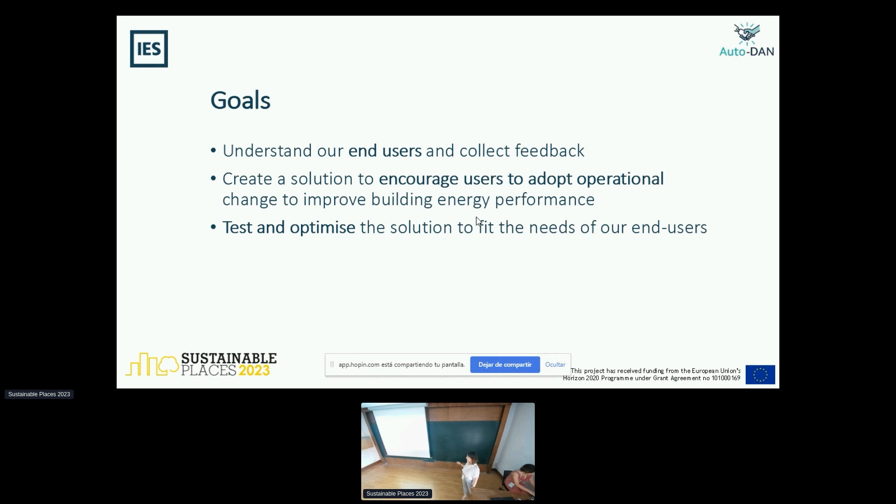Those were the goals. So the process is human-centric design. The user is the core of the whole process. And I would say it is divided in 3 blocks. First you have the strategic alignment. Then you have research and analysis, which go together. And at the end, you have design and test.

I just put a description here of a common way to describe human-centric design. This is a problem-solving technique that puts people in the center. So you actually meet the user needs, because I'm sure all of us have seen products that at the end don't meet what the user expected, and that's actually a shame, because you probably put a lot of effort into that product.

So what are the questions behind this process? The common way: why, what, and how. Why: what motivates the user? What are the drivers? Then what are the features that they expect, and how it's going to look. That's where the design comes into place, and the style of the final platform.

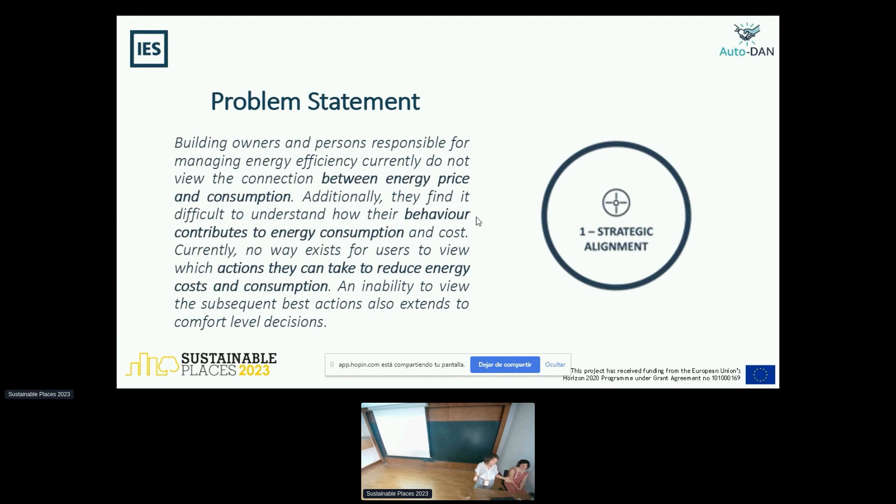the energy consumption. So currently, as I said here, there is no way for users to know which actions to take to change the energy consumption. So that was the problem. We need a dashboard, well, not a dashboard, but a full platform that helps users decide what to do to change the consumption.

So from that stage, we also defined the goal. The goal was to create these augmented intelligence dashboards where you can visualize trends in energy. You can also provide feedback and recommendations to the user and execute some demand response actions. We're trying to make the automated control of it. That's in progress at the moment.

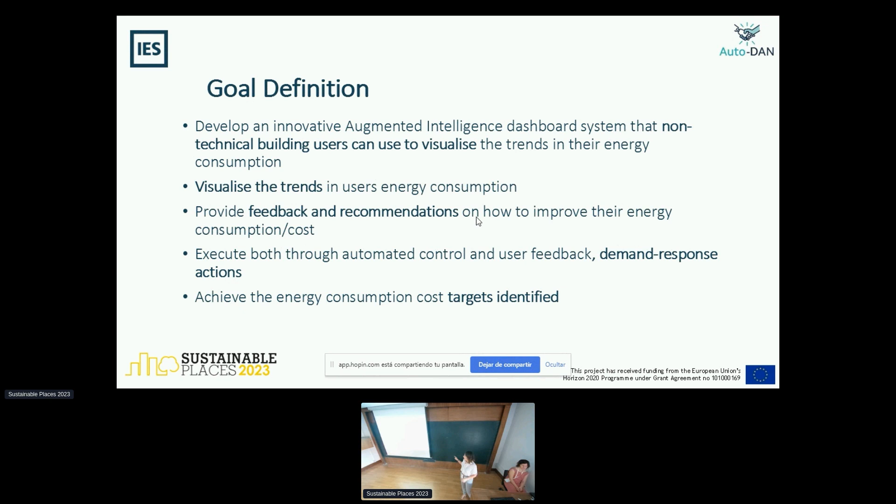And identify the targets. And then after that, when we have this problem resolved, defined, and everyone agrees, we start with the research and analysis. Here there are a lot of workshops and user interviews and desk studies on behavioral and psychological theories about how people accept certain recommendations. And this is going to give the persona that is going to fit the final development.

That takes a lot of time, because if you want to do it well, you have to use a lot of communication, and communication takes time. So after that, that's what we had in our Amsterdam project. That's the building, the users that we had. And each of them are different, and each of them have different needs and different drivers and interests. So there's a big difference between a business owner or a student, right?

So we found out most business owners or managers are more focused, as expected. They were more interested in cutting costs, reducing the energy, or knowing when this high peak is and how can I change that peak. And then you have other ones, like the students, that don't even pay attention, they don't pay the bills, so they were more keen on comfort than maybe a building manager.

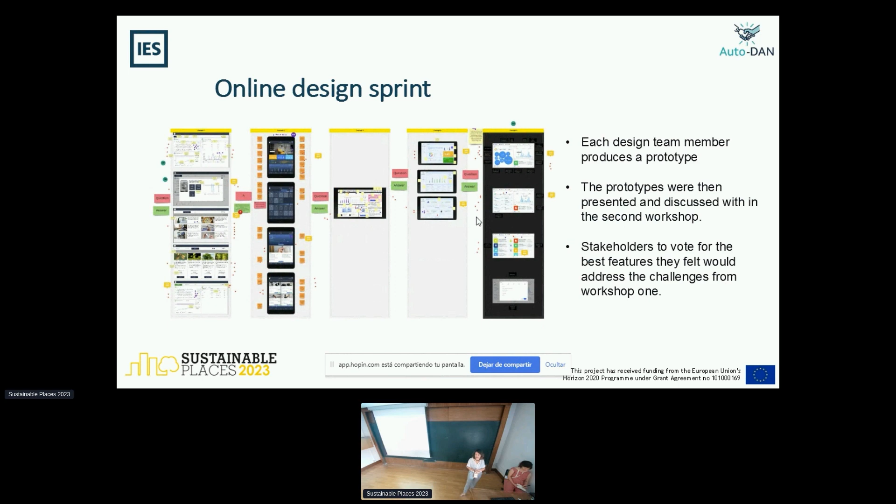I just put pictures here of the online design sprint, where each design team member produces a prototype. Then the prototype is discussed, then they decide which one is right, and at the end of the day the stakeholders vote on which one actually addresses what they expected. Not all of the solutions were validated. For some of them it was, okay, we cannot add that, right? That's also the challenge of having users involved: they want to cover everything in the needs, and that's not easy.

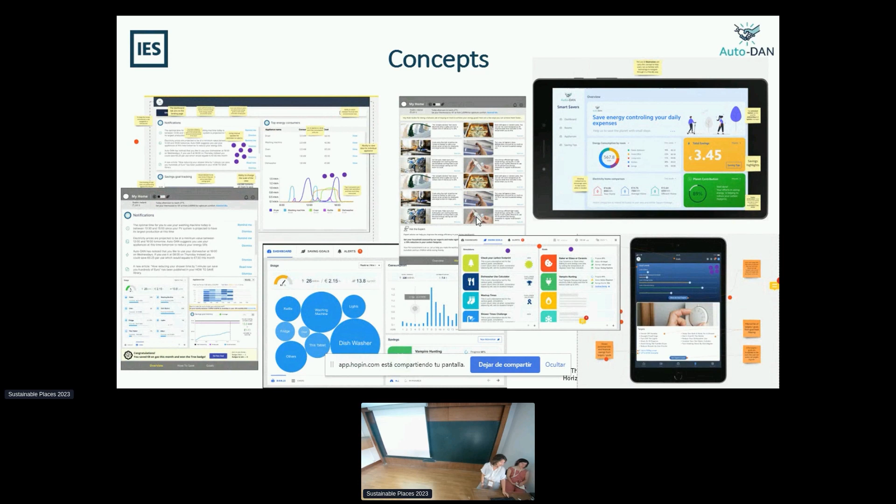The second slide is just to show you a bit of the final concepts that ended up there, and that's the final prototype. Well, as I said, I think it needs continuous input and it's going to keep improving. So that's the home page. You will open your dashboard. You will see common operational conditions like indoor conditions and temperature, right? So in the first overview, the displays you have here.

You will have the display of your real-time energy consumption and also the breakdown of the appliances, which is noisy on the back-end side because sometimes you have a smart plug, sometimes you don't, and that's a difficult one. Then you can see your energy savings compared to some goals that you can set, the appliances usage, then the sensors for humidity and temperature. And on the right-hand side you can see the recommendations: when to use your appliances based on energy prices and the pattern of your own behavior.

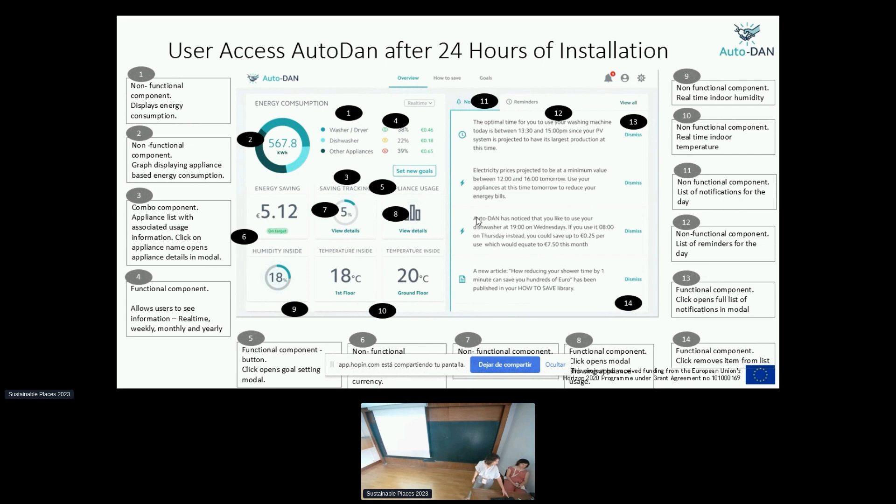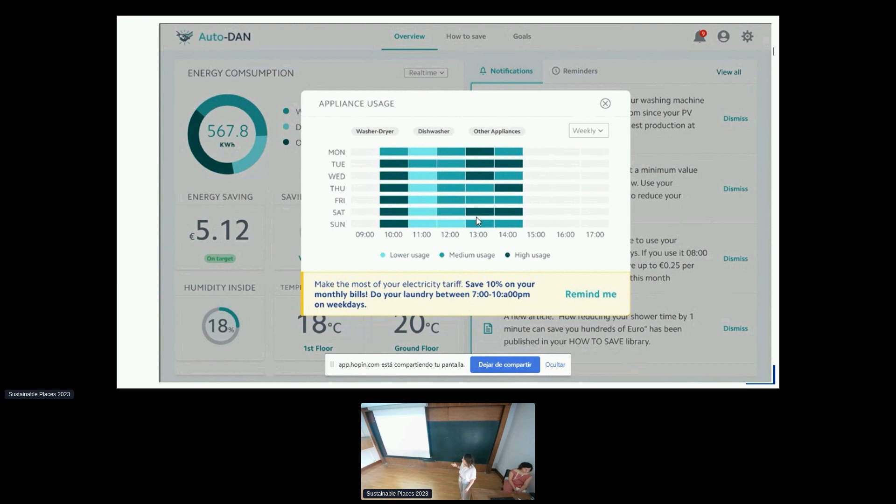I just put three tabs so we can have an idea. For the appliances usage, the user here is able to see where the peak of usage is, the lower and the medium. Because you use your appliances, but you're not aware of how often you use them. Do I put the dishwasher on all the time at the same time? So here you have a clear picture. I think it's very visual, and the user has a clear picture of when they use their appliances the most.

And that's part of the goals I was mentioning. You can set up your goals, so at the end you can compare how you are doing against your goals. Goals sometimes are just the benchmark, right? Like the previous bills maybe, or you can just check against the past. Some people are very clear, but usually at the domestic level they are more oriented to previous bills. And that's about all.

So I just put three points as conclusions. We discovered the information communicated was relevant, so we have this continuous communication with the users. We believe the energy consumption financial aspect will potentially change the drive. If you actually show that you're going to save that amount of money, that's something users like. The product, as they said, will continue to be monitored, and we still need to gather conditions in the platform to align with the whole project. Some people are doing different tools for demand response, for instance, so we need to make sure that aligns and we can show it there.

And then the last sentence: end users are not taken only as customers, but also as co-designers of the solution. I think that's the key point of the UX design team in IES, who put a lot of effort here. And that's me.

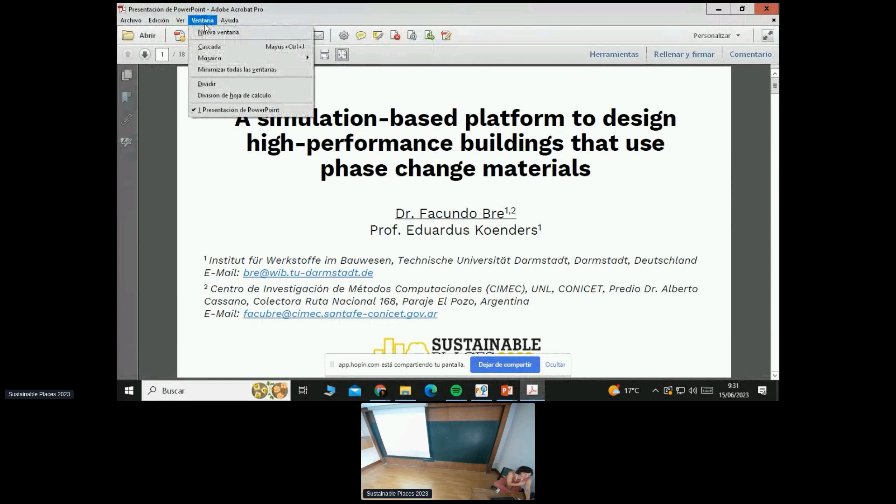Sorted. So did you receive this presentation? Yes, we fixed it so we can follow the same order. Okay. That's not the slides for today. No. But I just sent it to the account. It's not this. So this is an older version. Yeah, that's my presentation for tomorrow. Okay, sorry. I'm sorry. Maybe I sent the wrong one. This one or no? No. Okay.

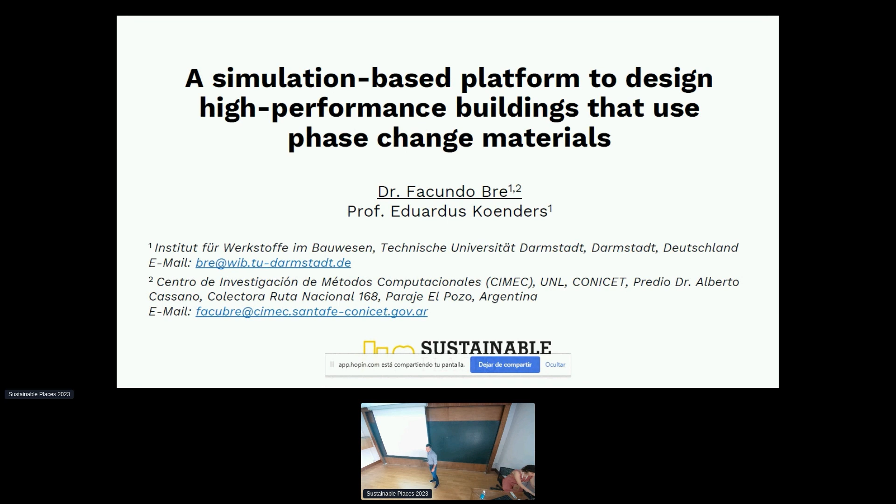Well, good morning, everyone. My name is Facundo Bre. Currently, I'm working as a Marie Curie Individual Fellow at TU Darmstadt in Germany. And today, I'm going to talk about a simulation-based platform to design high-performance buildings that use phase change materials.

So, to start, let's talk about phase change materials, or PCMs. As you probably know, these materials are substances that can absorb and release large amounts of heat during the phase transition. In this picture, we can see the main difference between a material without phase transition and a material with phase change: the PCM can accumulate and release large amounts of heat without increasing the temperature of the material and the surroundings.

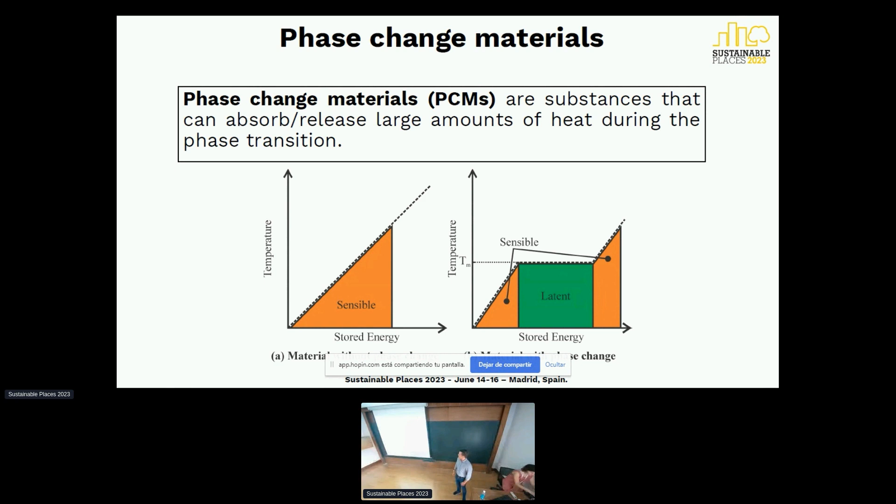We can employ this phenomenon in buildings for heating and cooling applications, but this is the ideal theory. In practice, we have the challenge to transfer this ideal theory to real-world applications. And despite plenty of contributions in this field, we see a lack of full understanding of the best way to design PCM in buildings. In this context, the 0E-BUILDINGS project aims to develop a simulation-based platform to evaluate and optimize PCM in buildings. In this presentation, I will show some of the results we got during the project.

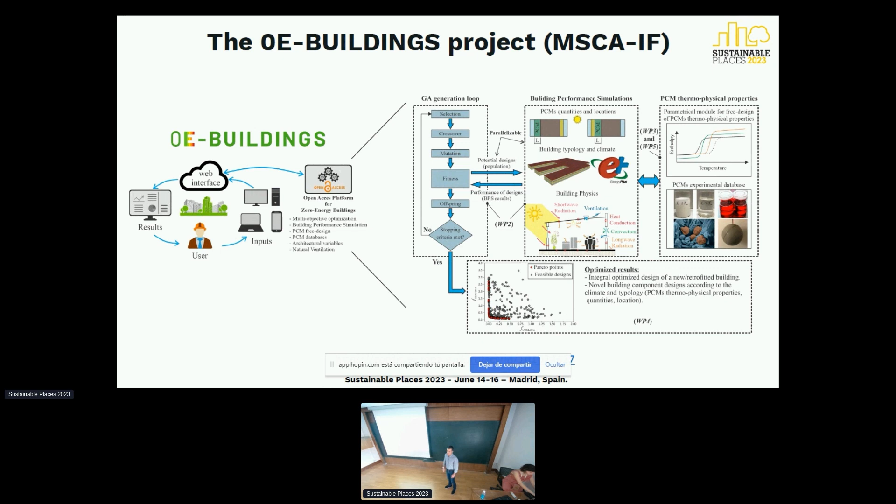My presentation is quite technical, sorry. Regarding the modeling of PCM, there are several approaches. For example, in EnergyPlus, the thermal capacity of the PCM is calculated using this equation, a numerical derivative, where above we have the difference between the current and previous enthalpy, and below the difference between the current and previous temperature. I recommend using that model, the single curve model of EnergyPlus, and the main input is the enthalpy curve of the material as a function of the temperature.

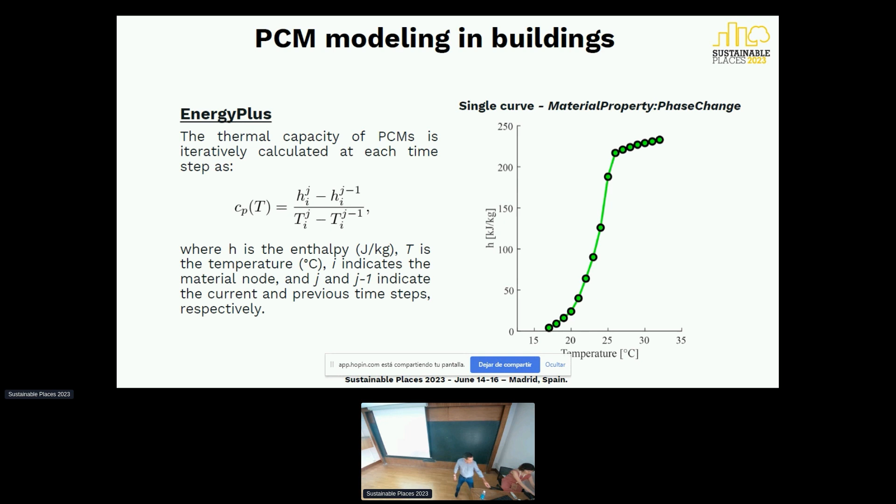There are also models to predict a particular phenomenon of PCM called hysteresis. And hysteresis introduces a temperature delay between the melting and solidification, complicating even more the behavior of PCM and the modeling.

And EnergyPlus also has a model to represent this phenomenon, but in one of our works, we demonstrate that that model is not energy conservative. That means that the model, because of the approach employed, generates a virtual or numerical energy, and we can predict large heating and cooling load savings that actually don't exist.

And I will not describe this work, but anyway, this is a problem of the whole state of the art, not only for EnergyPlus, and in my opinion is a big challenge from the numerical point of view.

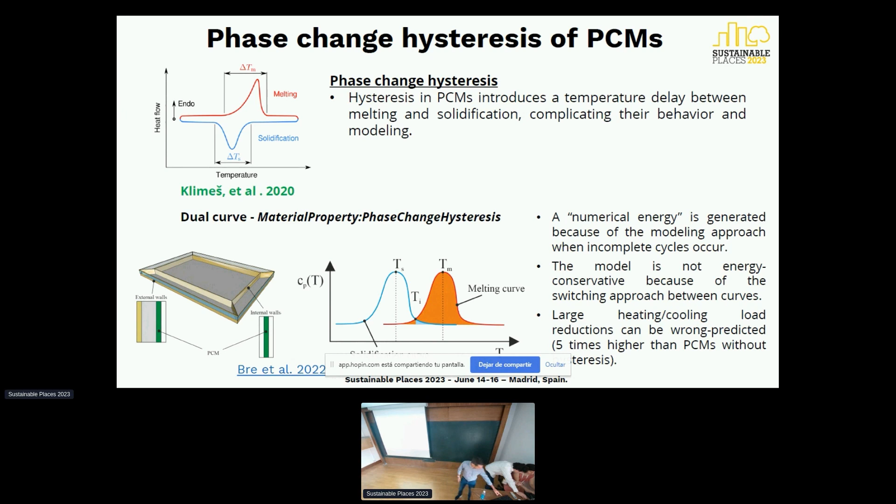What is important about the design of PCM in buildings? We have several PCM design parameters, such as melting temperature, location and amount, thermal conductivity, thermal capacity. But usually researchers focus on the first three, and in particular the melting temperature is considered as the main design parameter.

For example, if we take that commercial building and put PCM inside the building and optimize both heating and cooling load, we can obtain a Pareto front like this, where in one extreme we have the best design to reduce the heating load, and in the other extreme we have the best design to reduce the cooling load. Then the optimal melting temperature will be mostly within the temperature range of control of our HVAC system.

That is important because if we have a PCM with the melting temperature outside this range, that PCM will never have a phase transition during the occupied hours. So that PCM will never work for us. And then in the best design to reduce the heating, we have a melting temperature near the set point for heating, and in the best design to reduce the cooling, we have a melting temperature near the set point for cooling.

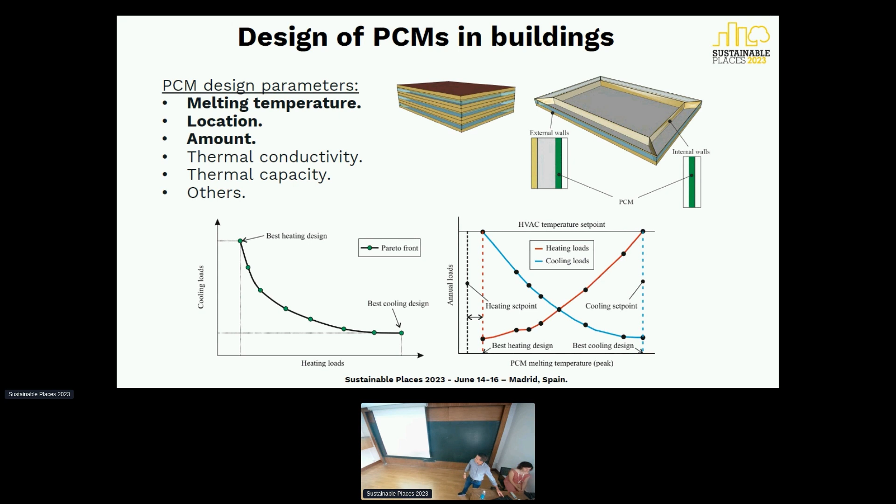So, given this trade-off, we propose to use optimized PCM with different melting temperatures in buildings. And that is one of the applications of our platform. So in this small office, we incorporate 3 different PCM layers in the external wall, the internal walls, and ceilings. And we solve a multi-objective optimization problem to reduce the annual heating and cooling load. And the design variables are the melting temperature and the thickness of each PCM layer.

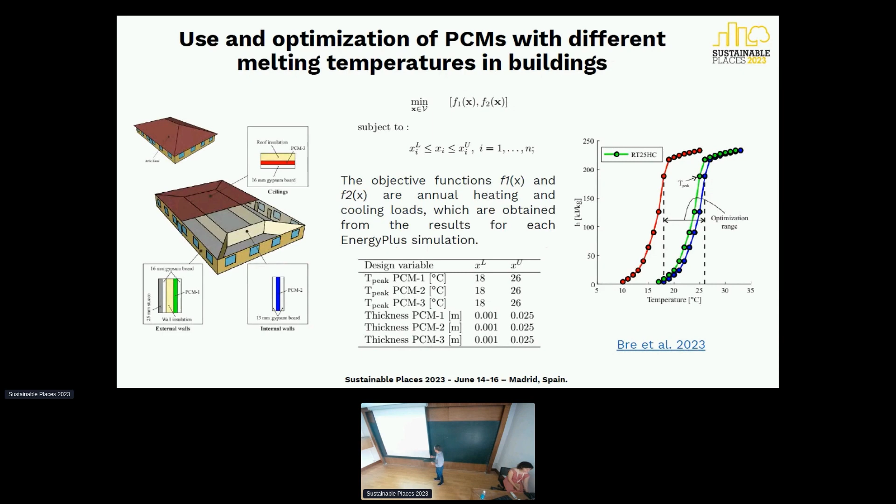So to evaluate this new approach, we selected climate representative locations according to the ASHRAE classification, and in particular in region 6 of the World Meteorological Organization, that is called Europe. The ASHRAE classification has 9 main climate zones or climate regions, classified according to the heating and cooling degree days. So thanks to the detailed information that Drew Crawley and Linda Lawrie provided us regarding the weather data they generate, we selected these representative locations that are the nearest location to the centroid of each climate zone.

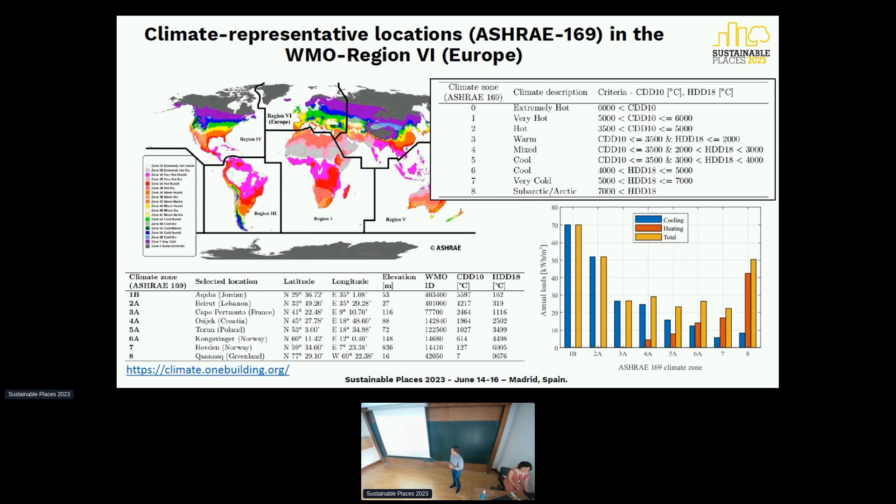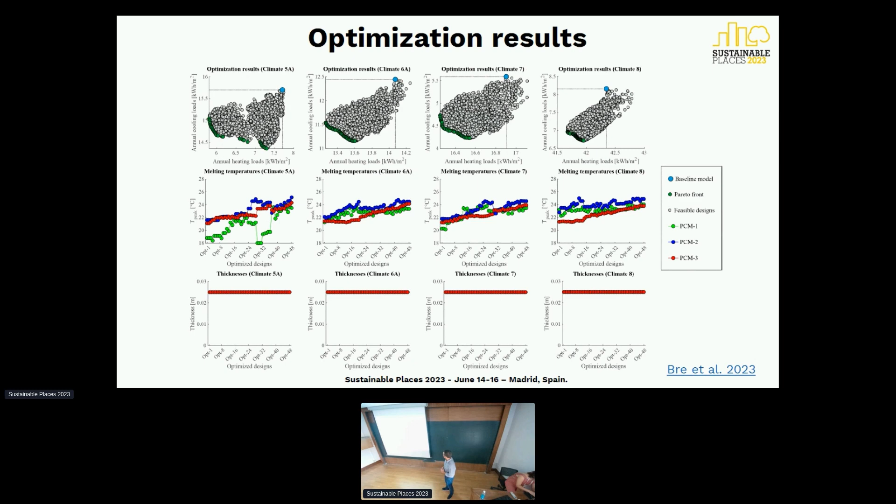And here we have the same result, but for regions 5, 6, 7, and 8. One observation is that the design space increases when we have both seasons and a good balance between both seasons. In this case, the optimal results for the amount of PCM were the maximum allowed, and the melting temperature again had specific values and different melting temperatures around the Pareto front, and we can derive a general conclusion. For example, in this climate region, the PCM located in the external wall is always designed to reduce the cooling load.

This is the summary of the annual load reductions for each climate zone, separating total load, heating and cooling. And the first conclusion that we can see here is that the best performance of PCM is achieved in climate regions where we have both seasons and a good balance between both seasons. For example, regions 5, 4, 6, and 7.

Another conclusion is that in climate regions that are highly cooling dominated, the performance of PCM can be limited. That is because the PCM cannot properly release the heat accumulated during the day because of the high temperature and the low temperature variation along the days.

Here we also conclude other general conclusions. For example, in climate regions where we have both loads, the optimal design of PCM is always designed to reduce the lower one. And that is because the effectiveness of PCM increases under this condition. For example, in heating dominated climate regions, it's easier to reduce the cooling load, and that is because we have a large temperature variation and the PCM can properly release the heat accumulated during the day. On the other hand, in cooling dominated climate regions, it's easier to reduce the heating load, and that is because we have enough extra heat to accumulate in our PCMs.

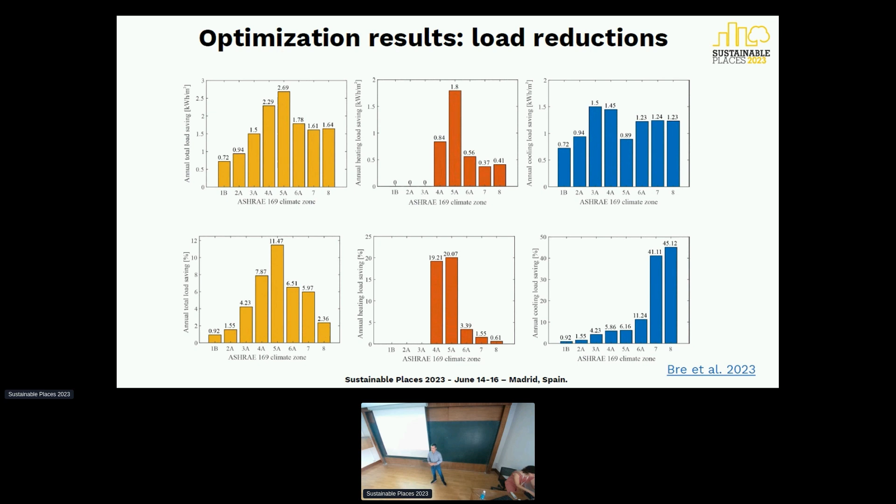So, during the project, despite the use of advanced building performance simulation and optimization, I feel that the real effectiveness of PCM is still complex to predict in buildings. So I decided to propose new indicators to estimate the effectiveness of PCM in buildings. And this is the indicator I propose. It's very simple. Calculate the effectiveness of the PCM as the ratio between the annual load reductions and the latent heat storage capacity

installed in the building. So to understand this new indicator, we propose a sensitivity analysis using the Morris method for this case study building, where we consider PCM design variables such as the thickness and melting temperature of two PCM layers located in the walls and the roof. But also we consider design variables related to the building envelope, such as the level of insulation, the window to wall ratio, and the dimension of the external shading.

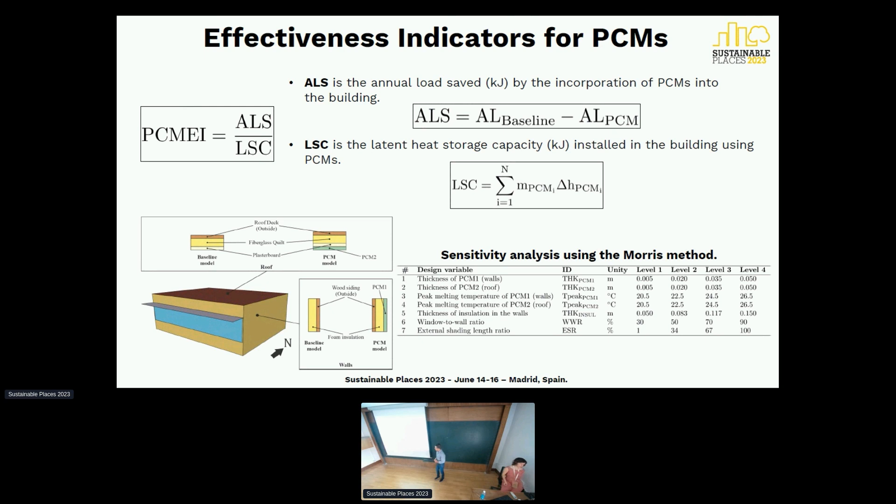These are the results of the sensitivity analysis. For example, for heating application, we can see that the most relevant design parameter is the window to wall ratio, followed by the amount of PCM in the roof and in the walls. For cooling application, again, the most relevant parameter is the window-to-wall ratio. Here, the dimension of the external shading takes relevance, because of the sun position, and also the amount of PCM is relevant. And for the total load, the results are similar, but with different magnitudes and order. Again, the window-to-wall ratio is the most relevant parameter. The amount is important, and the dimension of the external shading.

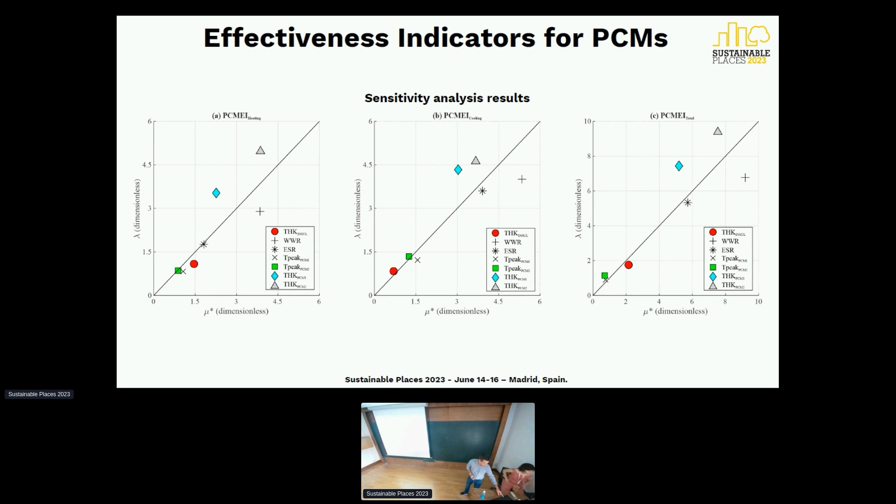So there are several observations we can have here, but the main conclusion is that we demonstrate that design variables related to the building envelope, such as the window-to-wall ratio, can have a high impact on the effectiveness of the PCM compared with typical design variables employed, such as the melting temperature. That is a big conclusion we obtain here.

So, some conclusions that I got during the project. Until now, the performance of PCM in buildings is complex, and the proper design requires the use of whole building performance simulation, not only for a wall or for a roof. And the melting temperature, amount, and location of the PCM should be carefully designed to maximize the performance. We also saw that the use of PCM with different melting temperatures is recommended, especially in climate zones and case studies with both heating and cooling load.

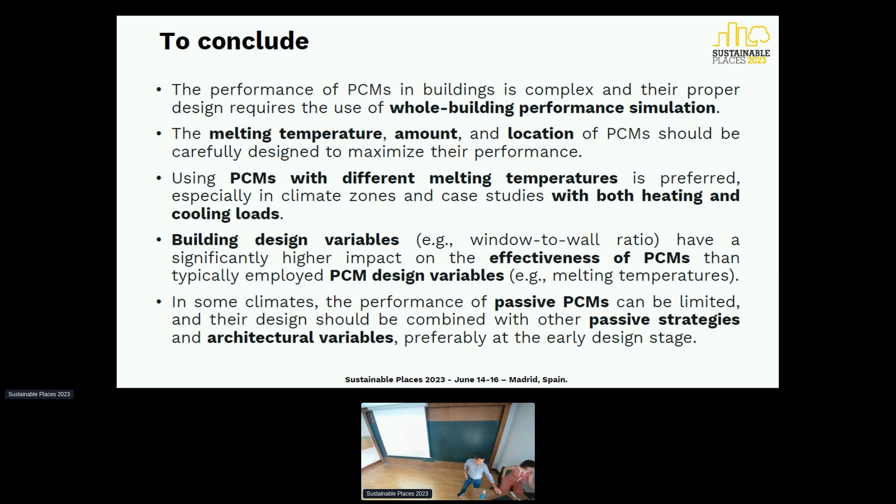Thanks to the new indicators, we demonstrate that building design variables such as the window-to-wall ratio have a significantly higher impact on the effectiveness of PCM than typically employed PCM design variables such as the melting temperature. We also saw that in some climates, the performance of passive PCM can be limited, so the design should be combined with other passive strategies and architectural variables. And in my opinion, at the early stage is better.

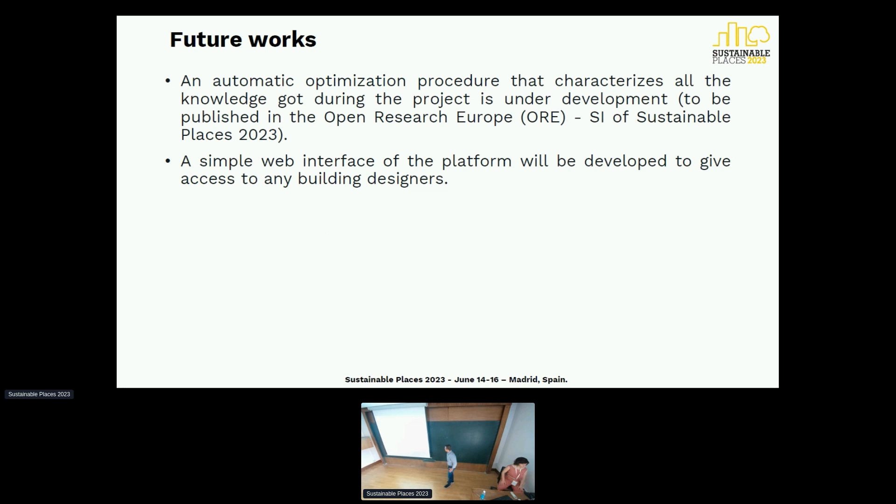So there are several future works, but I want to mention these two. I'm working on the new version of the platform that incorporates all the knowledge gained during the project. I plan to publish in the special issue of this conference. And a simple web interface of the platform will be developed to give access to any building designer. So this is also important. The research data generated during the project is available in the Zenodo repository, in particular in the ZEROBuilding community. So if you want to take a look and try.

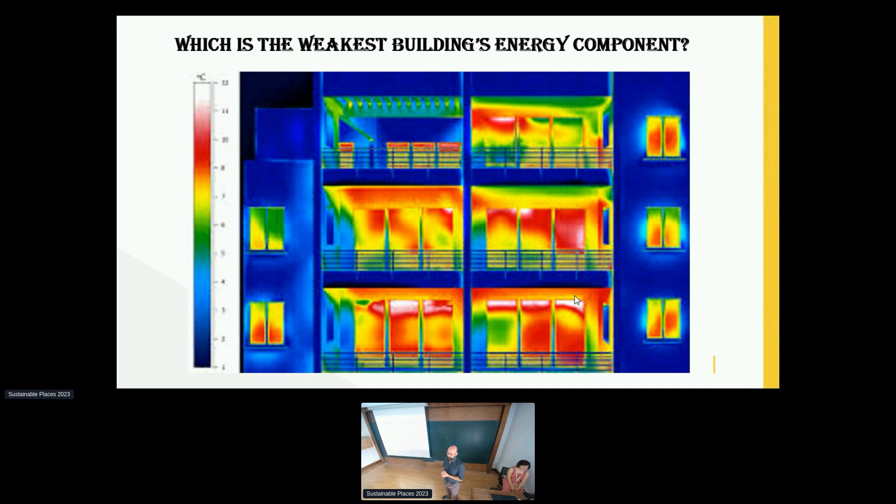Okay, I will present some results obtained in the frame of a European project called Infinite. I will focus on the effect and the impact of dynamic glazing, of smart windows. So let's start quickly with the impact of glazed facades in a building envelope. It's known that the glazed facade is the weakest energy point of the envelope, everybody knows that. But despite this, not many efforts have been put in the last 20 years in this direction.

Architects nowadays try to reconcile aesthetic issues with functional energy performance. It's not always easy because the environmental conditions affect the performance and the comfort if you have a glazed facade.

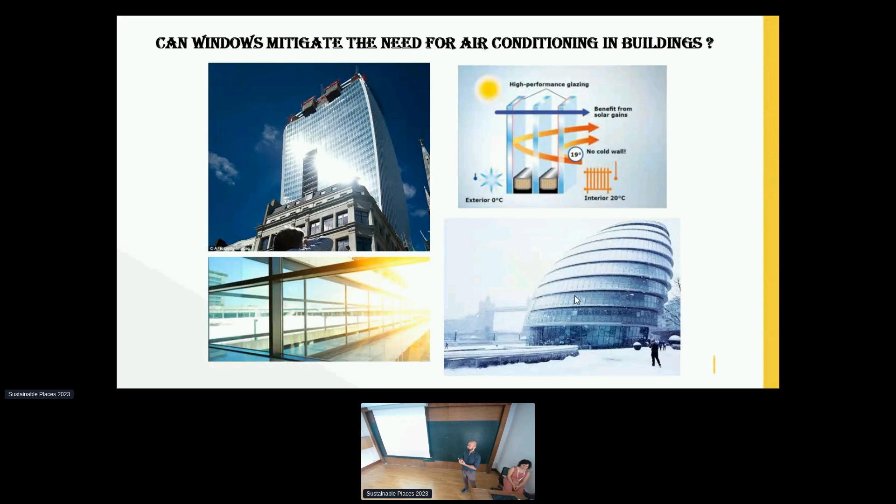So the impact of having a well-designed insulating glazing system in terms of European building stocks is huge. There are some studies made. One of the more recent studies made by TNO demonstrated more than 50% of the energy consumed in Europe for residential buildings can be saved if the windows could be replaced with better windows, let's say, with higher insulation properties. And of course, the reduction in terms of CO2 is huge.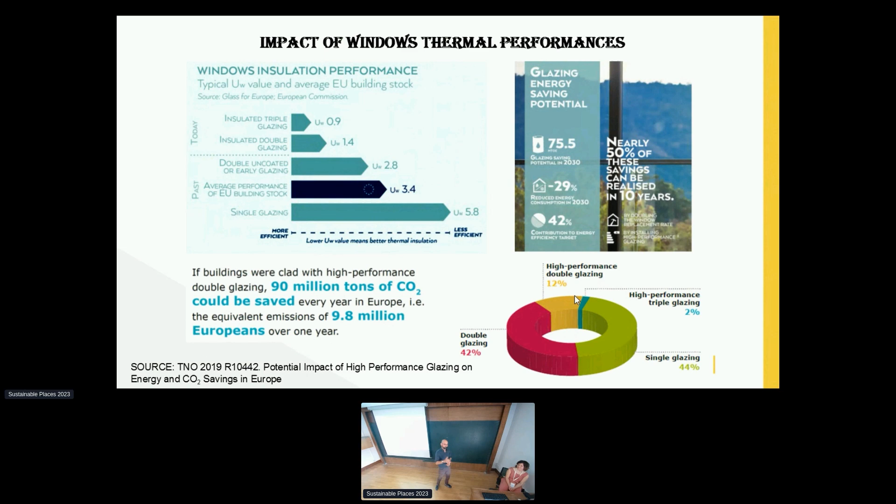So it's evident that improving the quality and efficiency of this is a good example here. We have, I guess, single layer glass of 40 years ago, more or less. So this is an absolutely huge topic. What's the trend in terms of the R&D and market perspective? The trend is going from windows with very high thermal transmittance to lower thermal transmittance, high insulating glazing systems. And the trend is to go toward net energy systems, dynamic glazing systems that can intelligently adapt to the different environmental conditions.

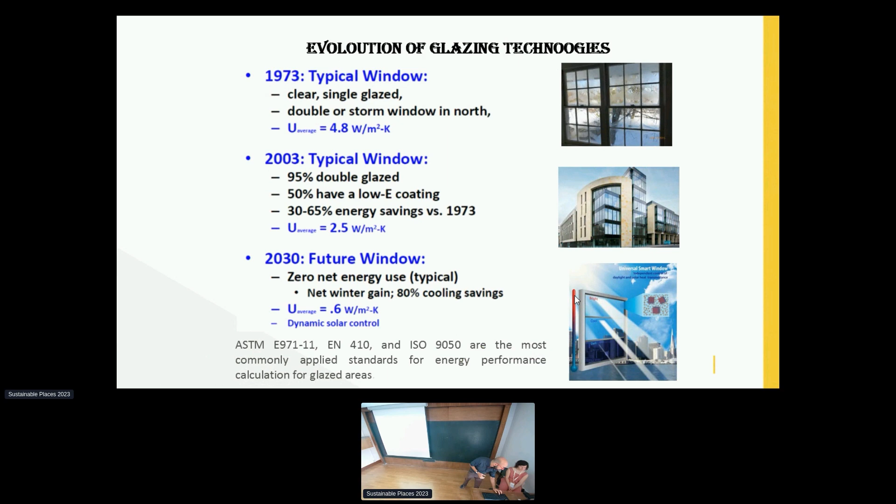Just a number. I don't want to spend so much time in introduction, but this is a number that is very, very useful. All the building designers focus on the thermal insulation and to guarantee good quality indoor. So typically, the issue is preserving the heat generated indoor, for instance, in winter, to avoid thermal leakage. But if you consider the energy that you want to save in a winter condition with a typical wall of 1.1 watt per square meter per Kelvin, in winter you have a loss of about, let's say, 30 watts due to leakage of heat.

In summer, in the same building, same condition, if you just consider a glazing facade with a 60% solar factor, it's the classical number, the amount of energy produced by the sun that enters the building is about 460 watts. So it's, let's say, 20 times higher. And this is an imbalance in the design of the building envelope. Too many efforts in having super insulating walls and not enough effort to have very efficient glazing facades.

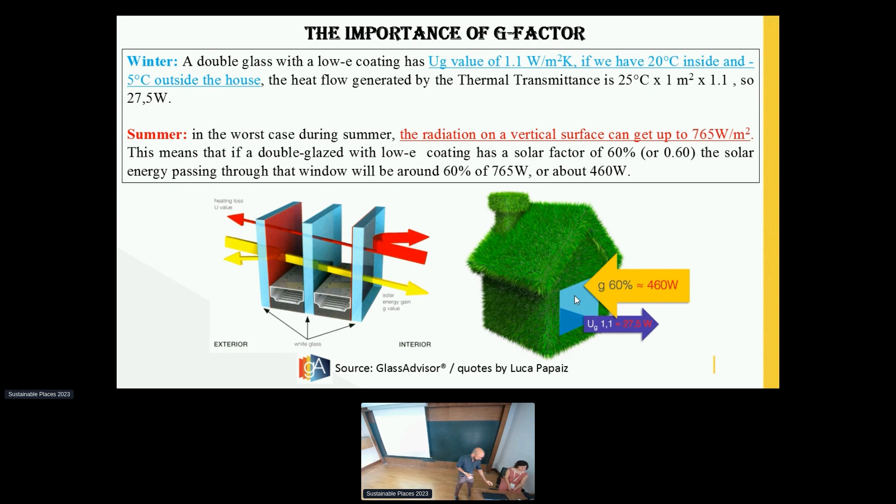So, what's our solution, our proposal? The technology we are working on consists in having smart, intelligent glass facades that can change their thermal properties. In particular, they can adapt to the near-infrared radiation, letting the thermal radiation enter the building or not, depending on the condition. For instance, in winter, you can have solar radiation reducing the heating loads, and in summer, you want to avoid heating up the environment. It's basically the same principle of PCM. Actually, some PCM materials are used as smart windows in some cases.

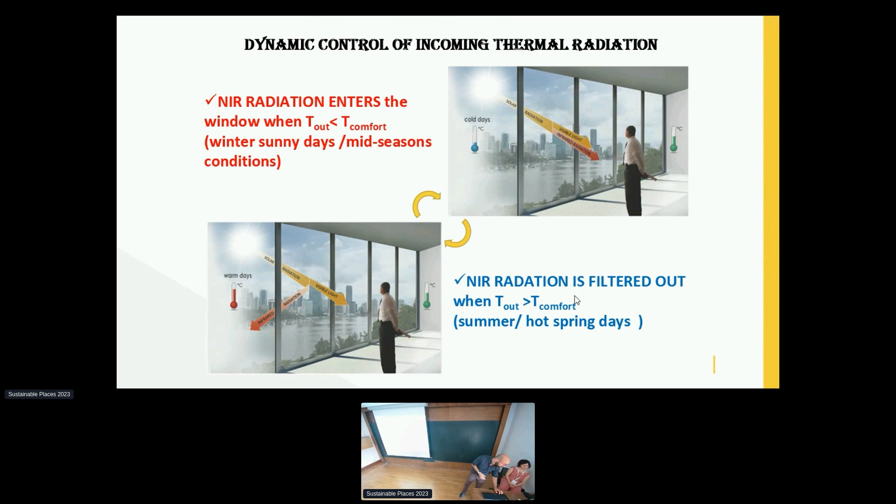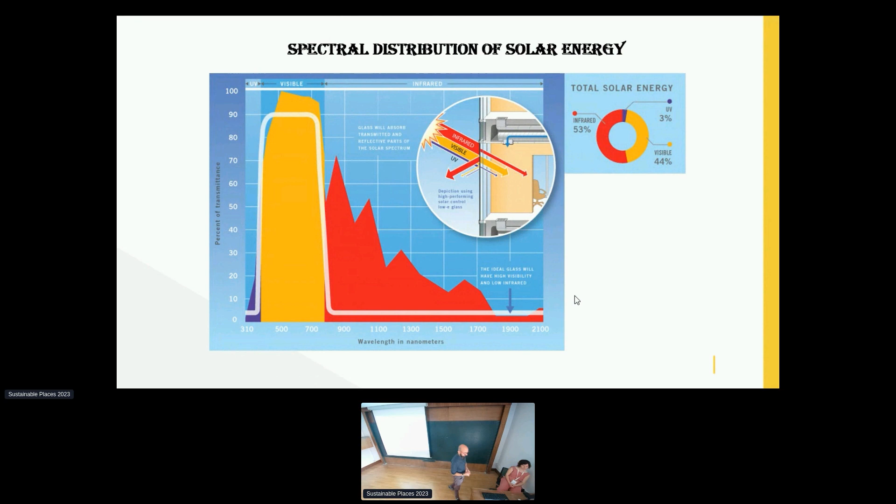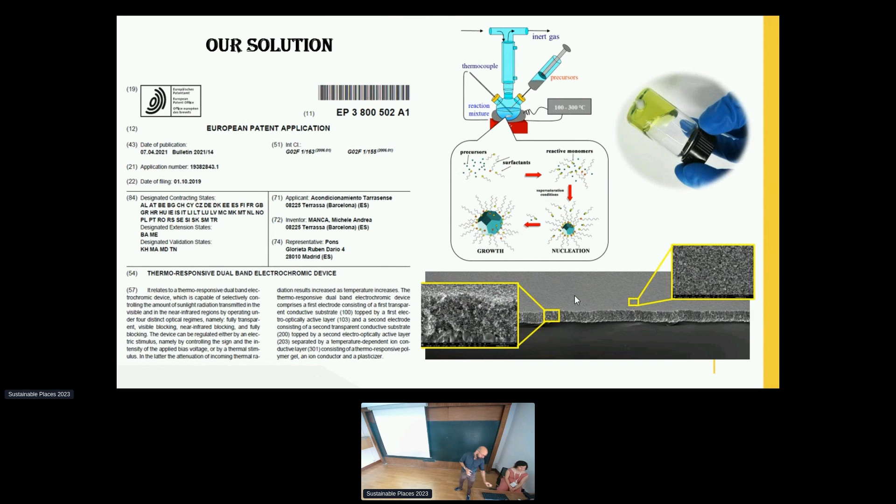This is why it's very important, because if you look at the solar spectrum, 50% of the energy transported by solar rays is in the near-infrared radiation. So 50% is thermal radiation. And we want to focus on this part. We patented a solution that allows us to implement what we refer to as dual-band electrochromic systems. Electrochromic glazings are systems that change their optical features. We improved the existing functionalities by using engineered nanomaterials. I don't go into these technical issues. Just a very quick spot.

Here you have a glass prototype under the solar simulator. So here you have sunlight. This is the intelligent glass. When the glass is off, the light passes through the glass and the black surface behind gets hot. This is imaging with the thermocamera. When you gradually activate the glass, it modulates the infrared radiation. The upper surface of the glass is getting hot, and the temperature behind is getting lower. So at the end, when you totally filter the solar radiation, the black surface behind is at the same color as the environment. So you are not heating up the environment behind.

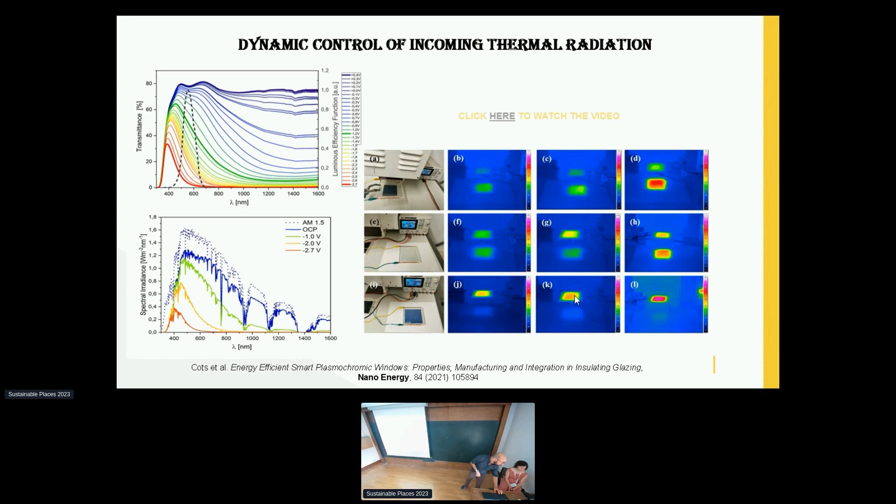So we are implementing this solution in the field, in the frame of the Infinite project, which is a project funded by Horizon 2020, focused on residential buildings. And the project is aiming at developing, let's say, 7 building kits that can be installed in a modular way on the building facade. In particular, I'm focusing on the smart window kit. In collaboration with VZ and Rubner, two companies involved in the development, we are integrating this solution into smart dynamic glazing that can easily be installed and used as a retrofitting solution. The idea is not to install in new buildings, but to renovate the existing ones.

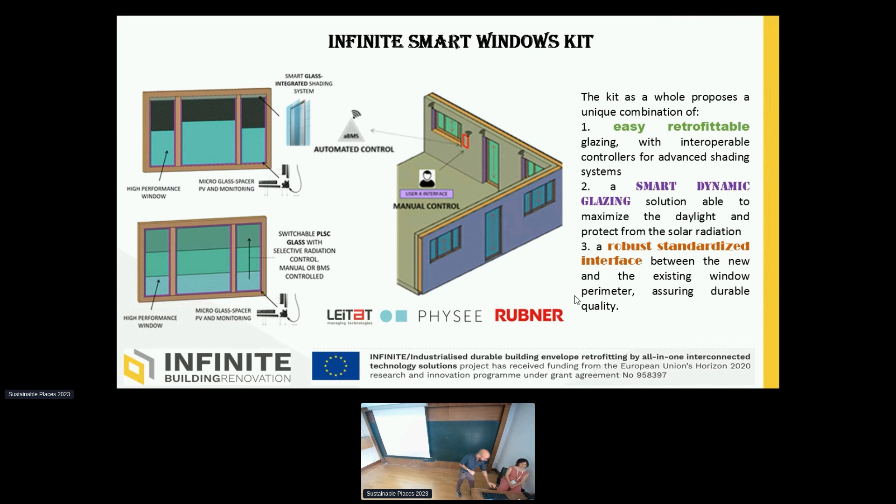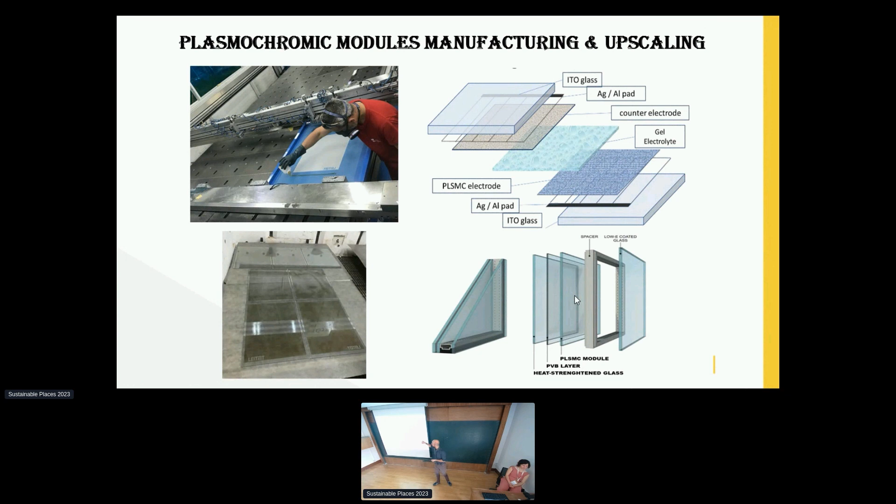So, a few words about the fabrication. We are fabricating these modules, this technology, from nano-engineered materials. We are using screen printing techniques. We fabricate these modules and integrate them in an IGU. These are a couple of pictures of the prototype.

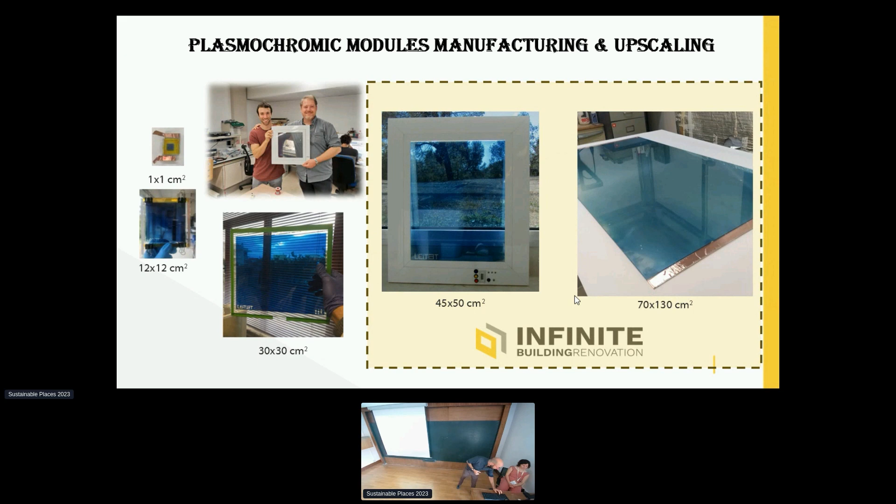We started a few years ago with lab-scale research, at small sizes, and then we put effort into scaling up the technology. These are a couple of prototypes that have been fabricated during the Infinite project. And what's the target? Okay, data about technical characterization, I can skip this part.

The idea is to integrate this technology, of course, with sensors and an Internet of Things platform. Because it doesn't make sense to have a very advanced technology that you are not able to control. So the two things go together: engineered nanomaterials and an efficient control platform.

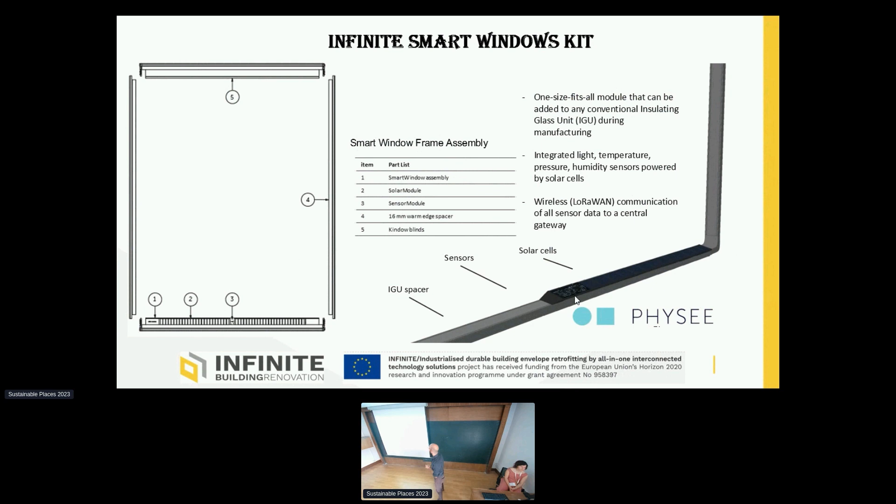PHYSEE is one of the partners of the project. They developed an intelligent control system that embeds a solar cell and sensors. It's integrated in the IGU spacer, so between the two glass panes of the window. And the data of the window are interfaced with what is referred to as BMS, so integrated in the overall building control system.

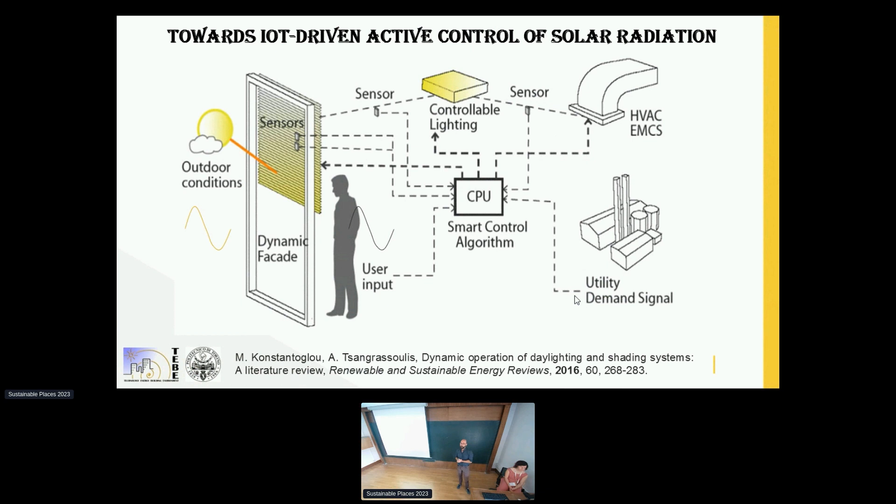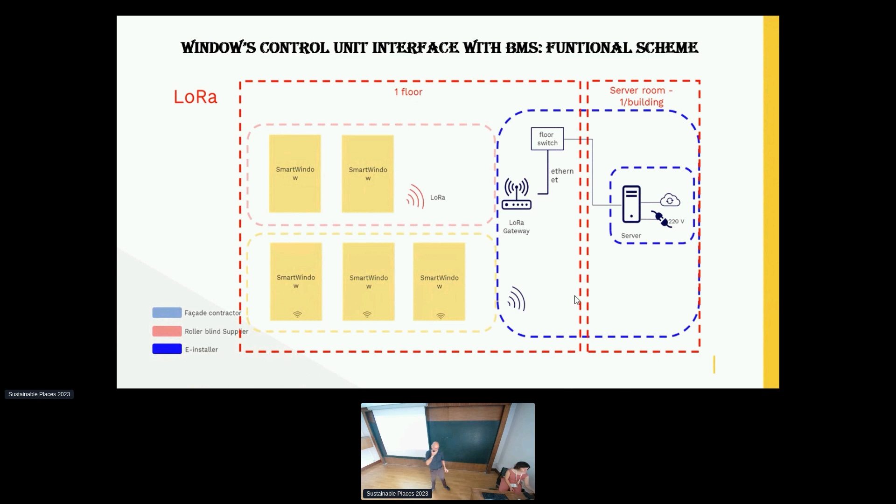In this way, the window is the driving force of the energy utilities of the building. So you know if you need to heat up the environment, knowing the information coming from the windows. This is a schematic representation of the system in terms of sensors and the CPU. All the modules are connected with the LoRaWAN Wi-Fi platform.

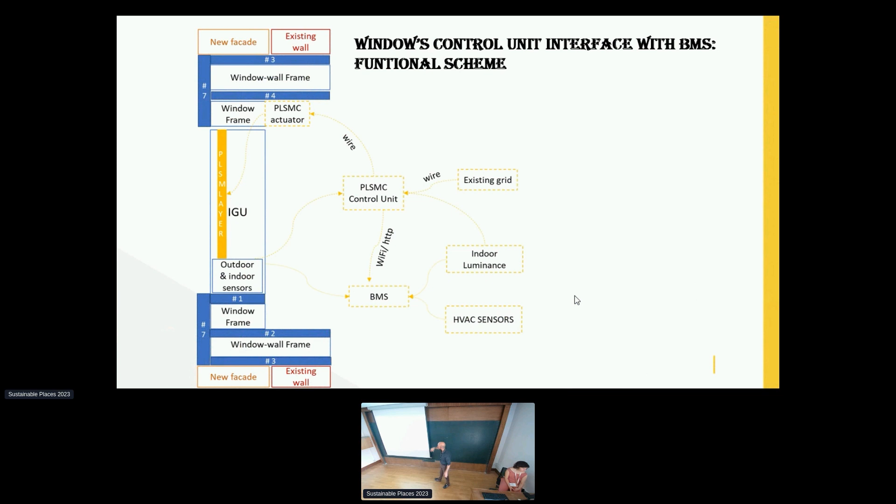This is an example of the integration of the IGU into the building frame. So you have the smart windows, the local actuator, the control unit interfaced with sensors. And about the control: you have smart windows, you want to implement an intelligent control algorithm, so a control model. An example of a good control model is reported here,

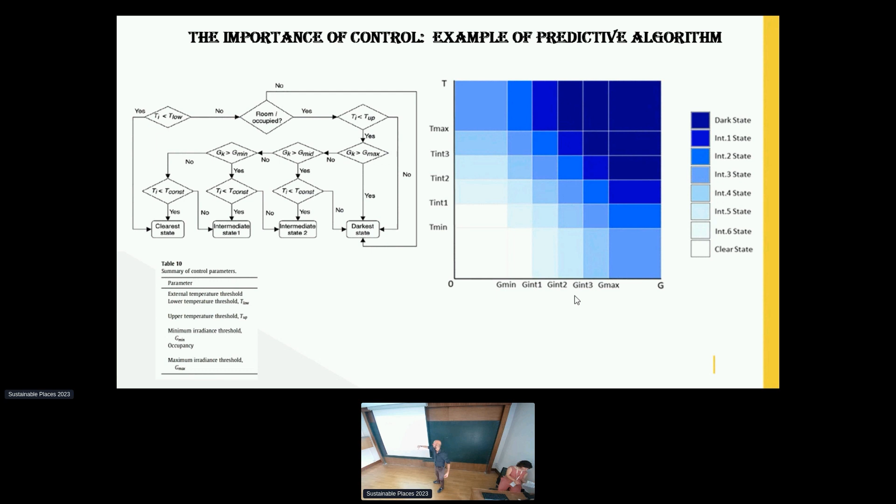And in this diagram, you see the colors that represent the color of the window when you need to filter it out. So low temperature, low solar radiation, window transparent. Maximum temperature, maximum sun intensity, the window is getting dark. Okay. This can be made.

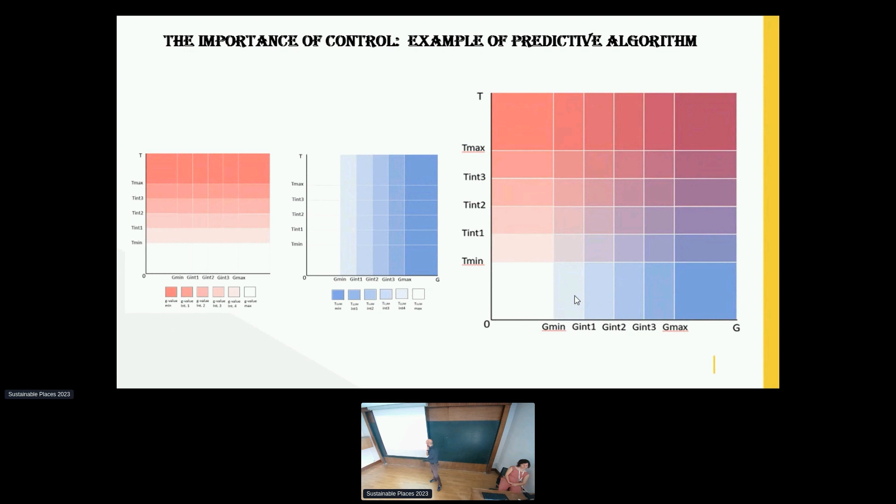The functionality can be extended due to the advances we made in this project by combining the two effects: the thermal radiation effect and the visible light effect. So when you only want to control the temperature, you don't need to make the window dark, because you want daylight in the building. This is the advantage of the technology we developed. It's called plasmochromic technology, a huge advance in terms of solar control capabilities.

Because at the end of the day, the window should be integrated in the overall management of the building parameters. To optimize visual comfort, thermal comfort, and energy performance, which are competing variables, you need to take into account plenty of variables, like luminance, solar radiation, thermal loads, occupancy loads. And here it is super important to have digital platforms and tools that support the data analysis.

So the next step in optimizing the performance of a building facade is integrating all the data and having an intelligent tool that allows the window to interact with the building occupant and the user. This is the final goal of every tool developed in the field of energy efficient buildings.

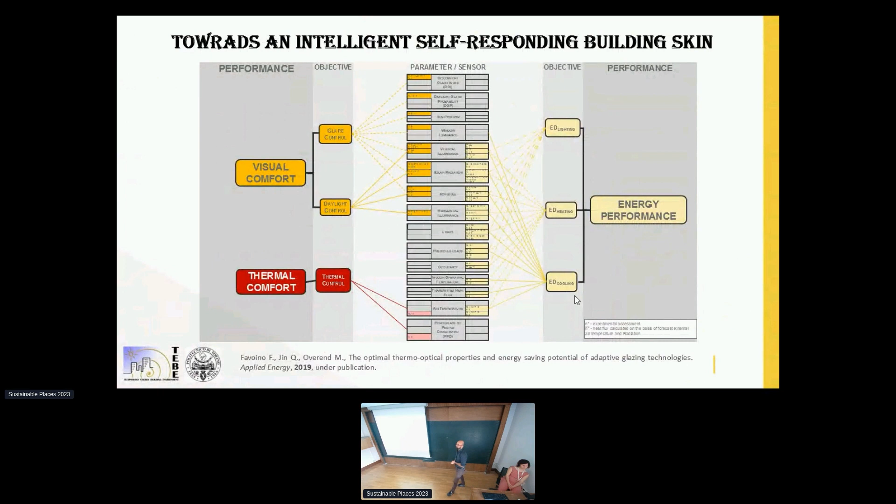So I guess that's all. Yeah. I tried to make it informal, just to put the focus on what could be interesting for you. If you have any particular curiosity.

I was just wondering if you have explored or considered any human behavior factors in these optimization and control algorithms? Yeah. This is the point. This is the point. When you make the window operate in automatic mode, which is the priority? Energy saving. Okay.

Sometimes energy saving is not in accordance with comfort. If today you want to optimize the energy performance of this building, maybe you start to get cold and say, no, increase the temperature. So comfort and energy should be conjugated, yeah. And this is why putting the user at the center, like the tool presented before, is the solution that integrates the technology.

Yeah, also the user could potentially want to make changes of their own, and this would then affect the algorithm. In the demo cases, actually, what happens is that the people living in the buildings, after a few days, switch off the automatic control. They don't want the automatic control. They regulate manually, because the automatic control follows energy parameters, and every person is different. So this is a big issue. It's not only related to the window. Exactly.

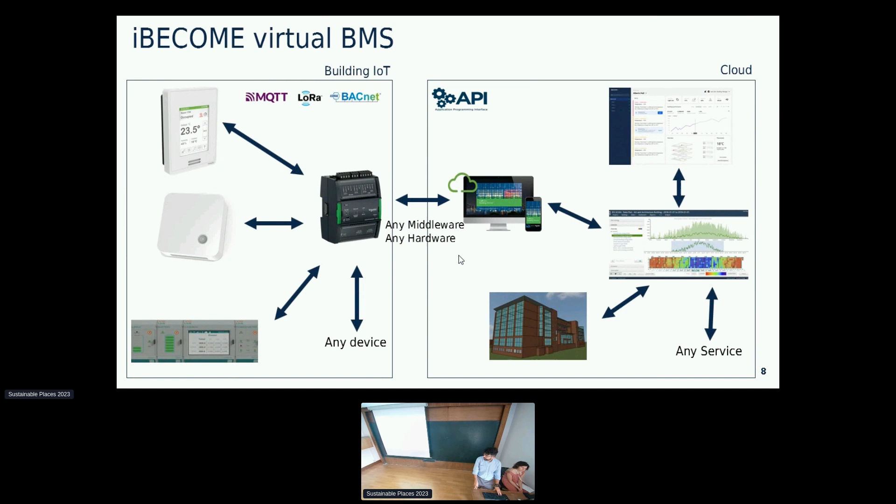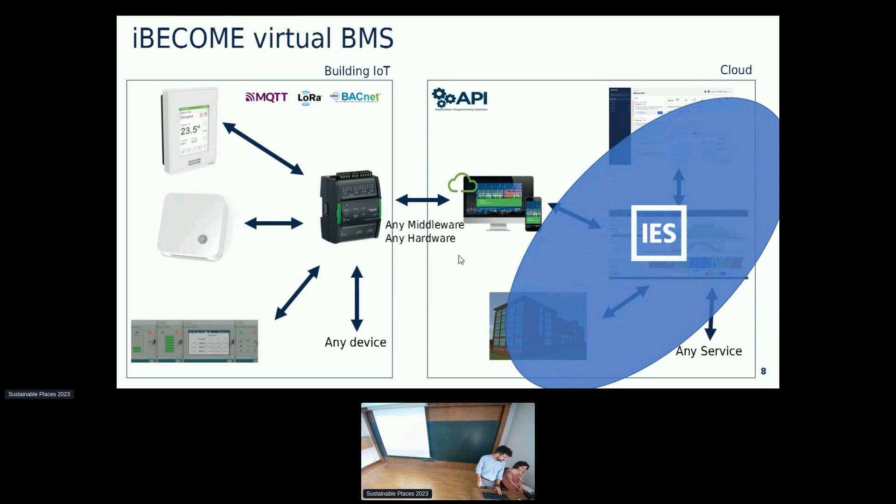We have the intelligence to tell the algorithm that no, you cannot participate in this event because there is not good thermal comfort in the building. So we need the equipment to work, for example. And our role as IES is on that side of the intelligent part, data analysis and monitoring of

the building. So just a quick glance at the services of the project: energy comfort optimization, M&V, measurement and verification, demand response, fault detection, diagnosis, predictive maintenance, and what-if scenarios. So using our model, we can even predict scenarios in the future.

And some additional services that can be enabled are healthcare management. So we demonstrate this as management of a care home, a home for elderly people. It's a separate application and demonstration. EV charging optimization and car sharing so far.

And the infrastructure of the project gives the benefit that someone who requires energy data and wants to develop a service can use our APIs. And the highlighted ones are the ones that we do in IES: energy optimization, M&V, and what-if scenarios.

So through this project, basically to achieve the goals of this project in IES, we didn't have the technology yet. So what we developed through the project was a new calibration tool on the cloud for the physics energy model, to make it an accurate representation of reality. That's how we call it, a calibration process.

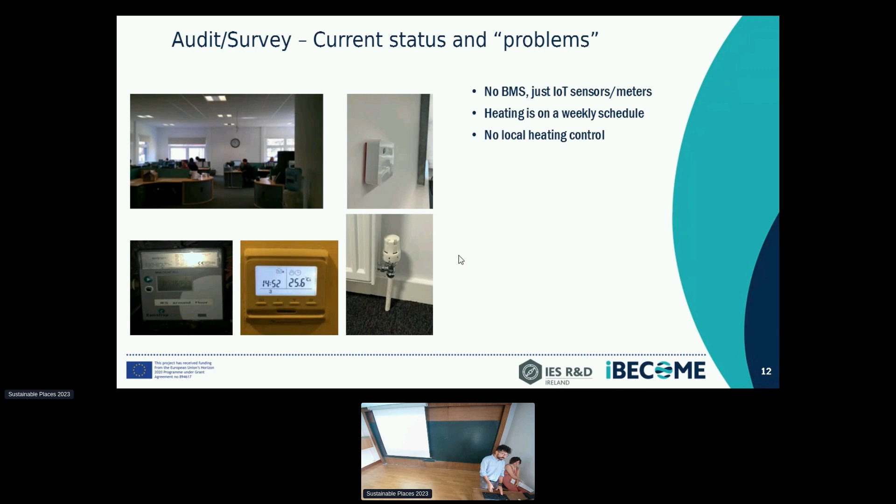The heating is on a weekly schedule, just like a normal office 9 to 5 operation. There's no local heating control. So, for example, some meeting rooms follow the overall schedule of the building, whether they're occupied or unoccupied. So sometimes they're heated but nobody is inside. There's also a temperature difference between different zones in the building.

We realized this winter that preheating is not enough on some very cold winter days. I already explained this one. We had a physics energy model developed in our engine, but it was outdated and created to achieve compliance with regulations. It usually happens when a building is designed or retrofitted.

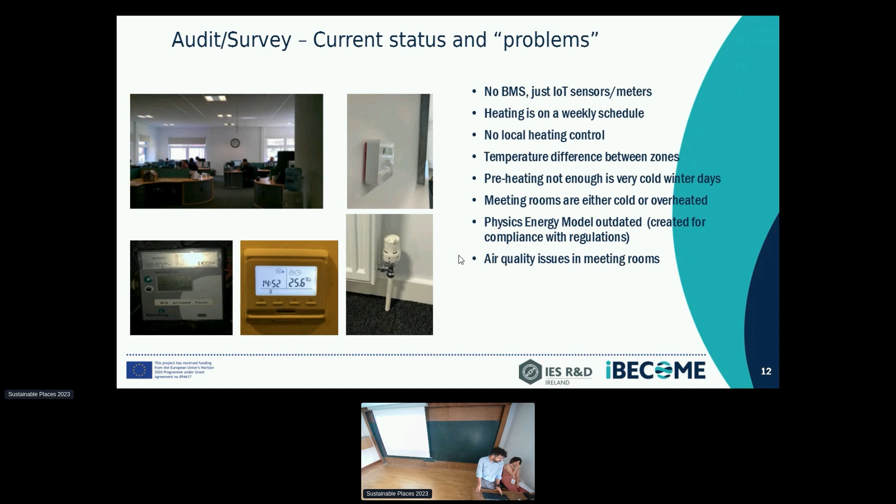An engineer applying for a permit needs to do an energy model and then they throw it somewhere. So this model can be revived, calibrated and used to optimize the energy in the operational phase of the building. There is certainly an air quality issue in meeting rooms. We measure a high concentration of CO2 primarily in meeting rooms, and there's no mechanical ventilation, just opening windows when the air is stuffy.

So now, what could be done in the building, what we have done to fix all these issues, is we installed devices that already exist in the market. So as you see, we replaced the thermostat with a Wi-Fi thermostat that's also portable.

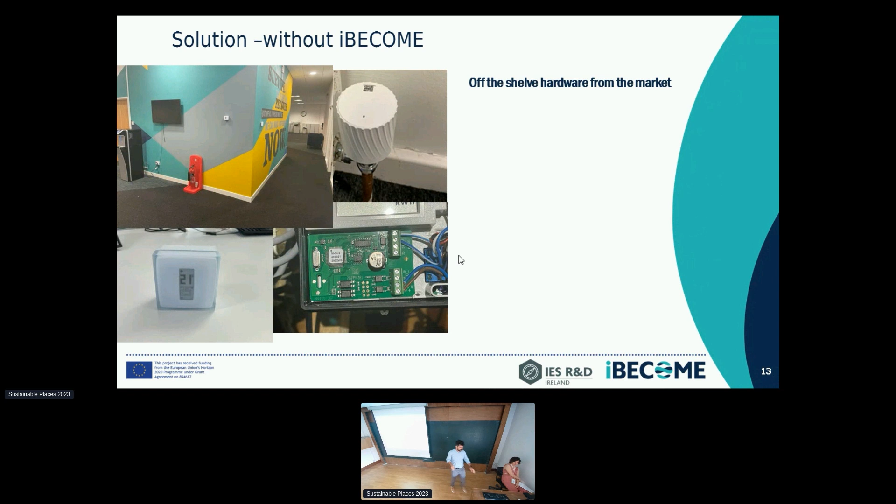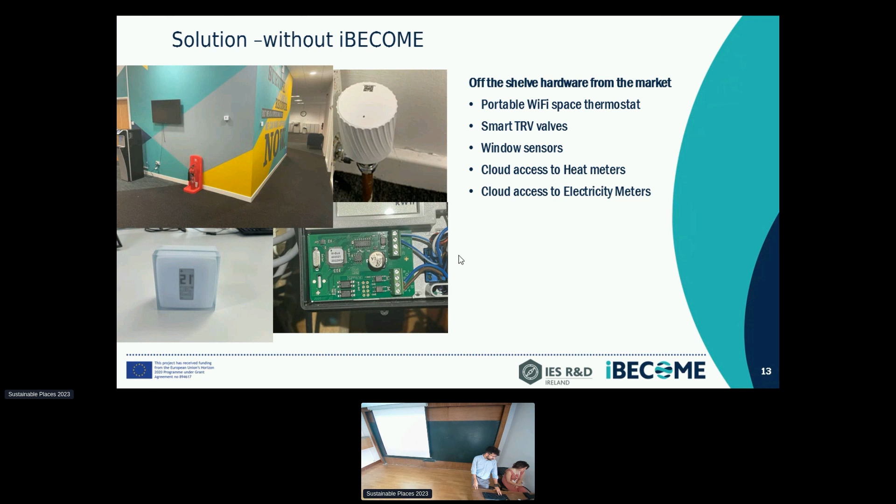We also replace the valves of the radiators with some smart valves that can be remotely controlled as well, and have also some sensors inside that measure again the same, like temperature and stuff. We install some window sensors. We managed to get the heat meters and electricity meters of the building to put the data on the cloud and get a continuous feed, every 1 hour, of readings from heat meters and electricity meters.

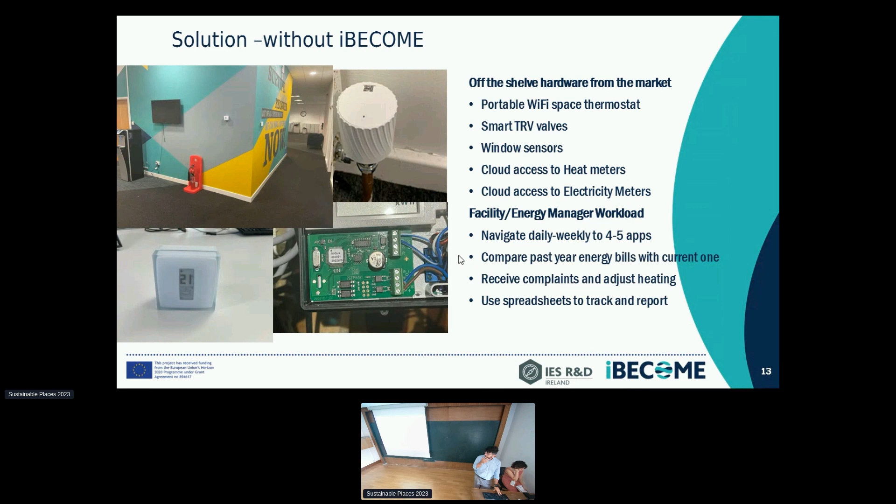So without the virtual BMS of iBECOME, the office manager of IES R&D would need to navigate to 4 or 5 apps every day: one app for the heat meter, one app for the electricity meter, one app for the TRV, one website for the thermostat, doing all this workload maybe daily, maybe once a week. Also to compare the energy bills before and after, receive complaints and again go into the different websites, adjust heating. It's basically a manual process, using spreadsheets to track and do reports and calling a technician when something fails. So it's all manual.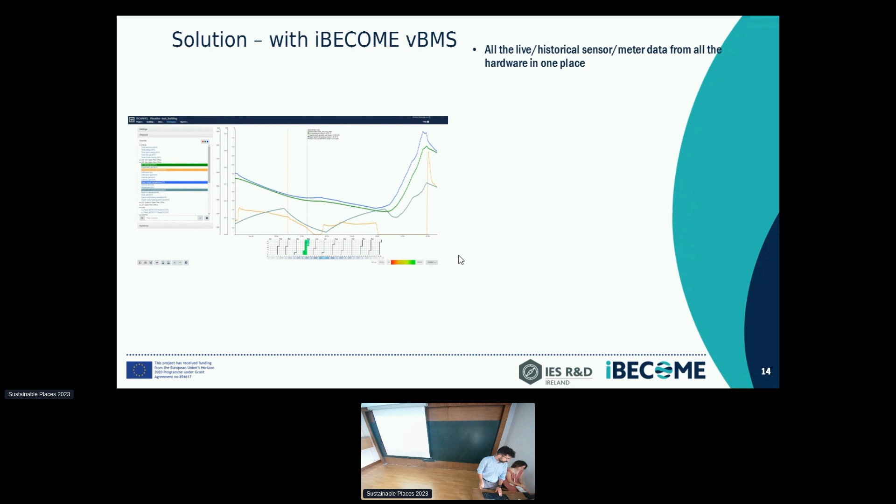And so now with iBECOME, we got into our software all the historical and the live data in one place. So the energy manager can log in only to this website and see all the live data, and even beyond the current time, since we do predictions. This line here is now, and this one is prediction, using machine learning and physics, so that we manage to optimize the energy in the building. A single dashboard: this screenshot is showing just one room and the conditions in the room, like temperature out of bounds, graphs with comfort zones, color coded so that they can easily get the message.

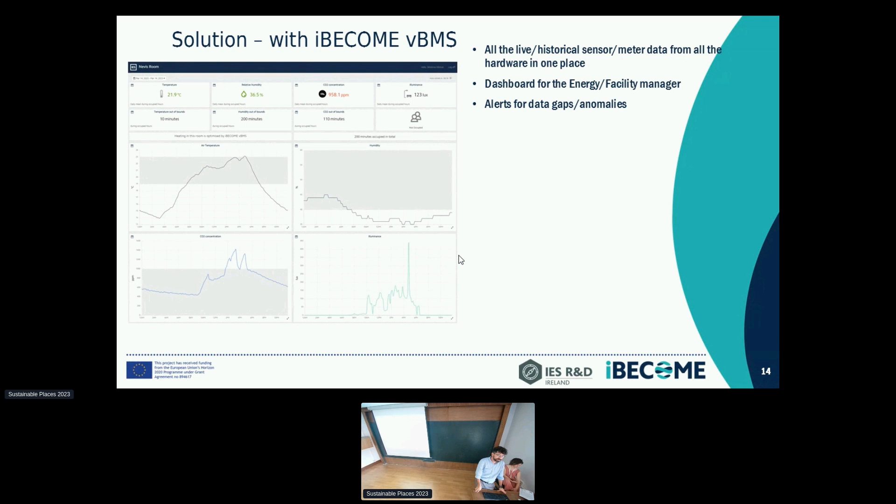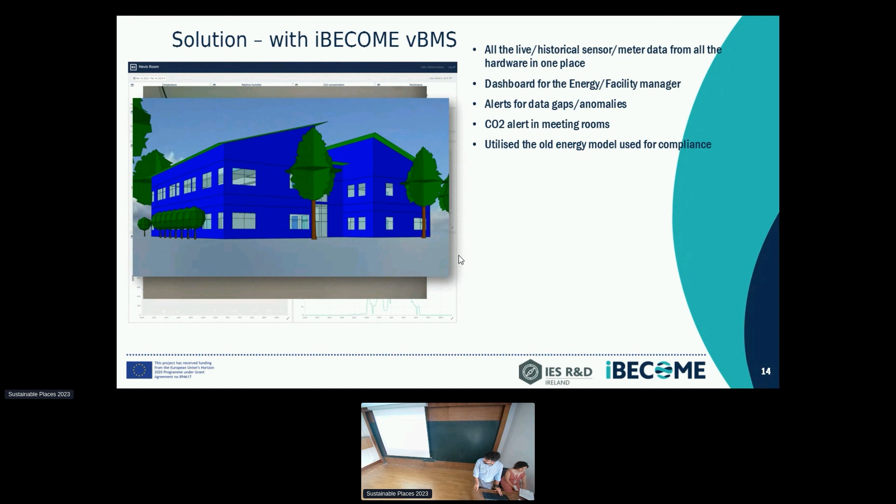Alerts for data gaps and anomalies. Because the sensors are battery powered, if a sensor goes offline, we get an alert. Or if there is a problem, we get an alert. For example, we faced an issue where one of the TRVs started leaking, and we detected some humidity. So using machine learning, we now detect if there is a leak in the TRVs. We've made an LED to alert when there is a CO2 issue, when it's above the comfort level, because CO2 is not easy to detect, and we prompt the users to open the windows. Again, we used our old energy model to recalibrate it. We're doing machine learning comfort predictions and fault detection.

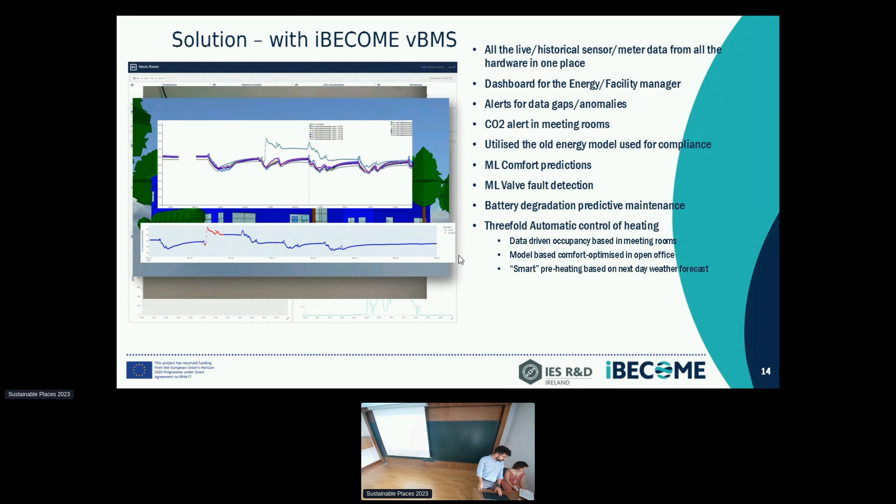And now the case study you see today is about the control of heating. So we do data-driven occupancy-based control in meeting rooms. That's one part, to optimize the meeting rooms. Model-based comfort optimization in the open office, and smart preheating for the next day based on the weather forecast. So this way we're trying to improve the energy use and primarily the comfort in the building.

And we set up a demand response advisor which tracks the prediction of the CO2 intensity of the next day and the energy price, and gives advice on when to charge devices or when to plug in devices. For example, there is a dehumidifier in the office. So we suggest, or even control through smart plugs directly: when there are lower CO2 emissions of the electricity grid, we switch on the device. And energy savings calculations using M&V and what-if scenarios, something that we again can do with the IES virtual BMS.

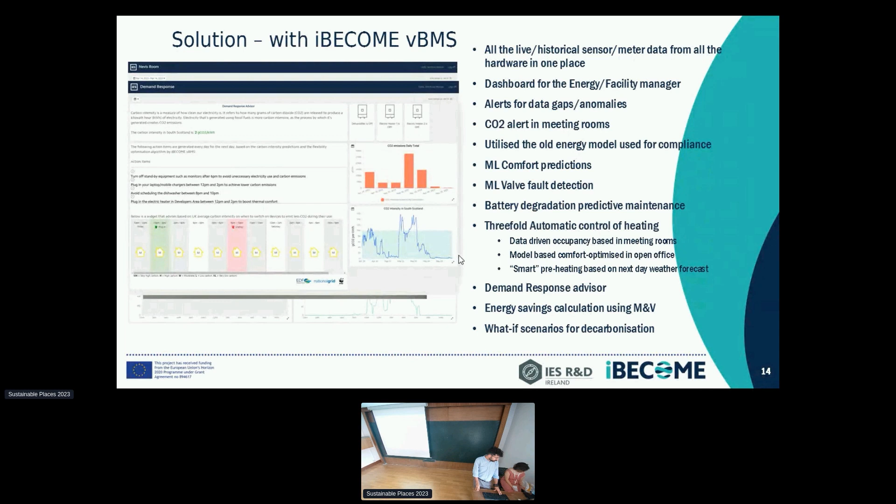So now quickly I'll show you this comparison we've made. It's not deployed on the building, but we did it last winter. It's a study using the energy model, a comparison between the current status of the heating, a proposed rule-based control, and an AI predictive control using artificial intelligence. So we estimated the energy savings, comfort improvements, and payback time when applying two different control strategies and comparing to the current status.

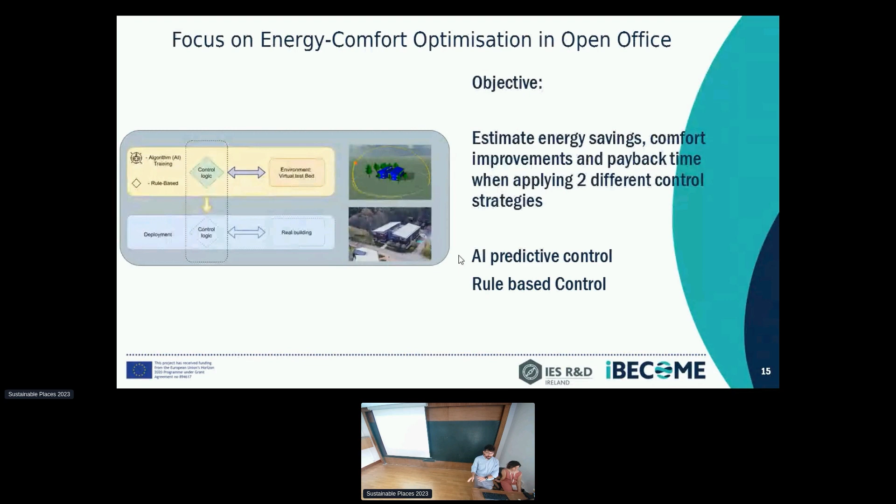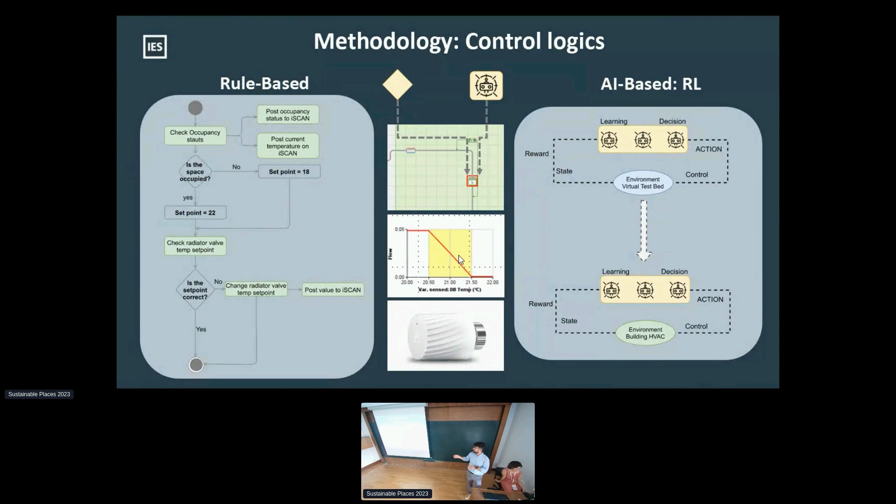This is a bit more technical. It shows the rule-based on the left-hand side, how it works, and the artificial intelligence one on the right-hand side, which is using reinforcement learning, an algorithm that rewards itself when it achieves better results. So this was applied to efficiently control the heating in a building, in comparison with a very simple rule base, like if the temperature is 22, reduce it to 18, like I said, fallback temperature.

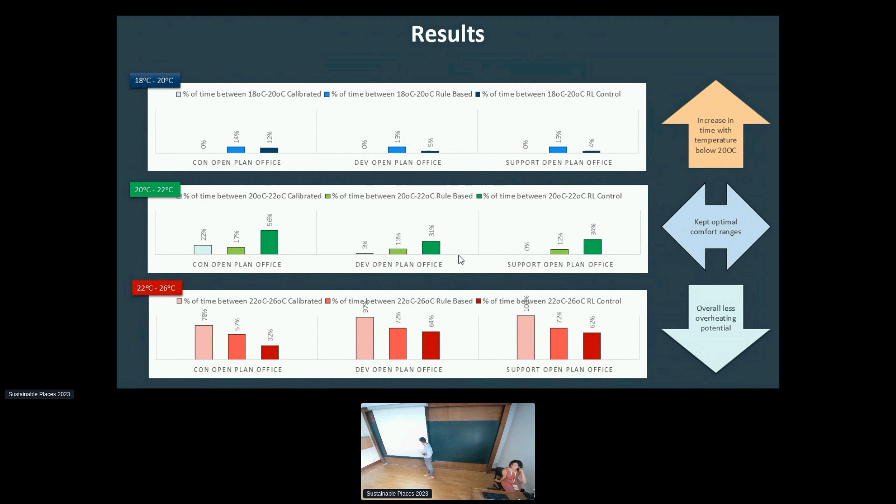So the results in terms of comfort, you can see in the arrows on the right-hand side, are a comparison between the current status, rule-based, and AI control. And these are temperature zones, like 18 to 20 degrees, 20 to 22, and overheating here. So as you see, with rule-based we reduce overheating, with artificial intelligence even more. So it shows some good results already: less overheating, more time in optimal comfort ranges using reinforcement learning.

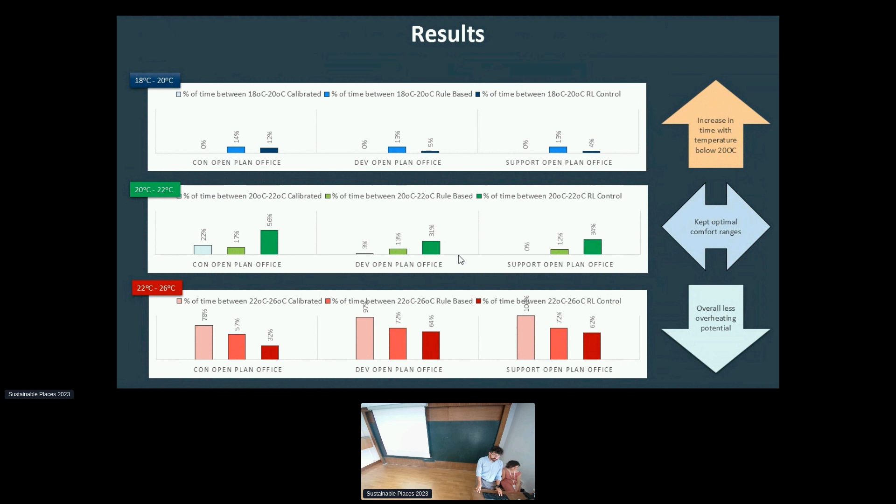And in terms of energy performance, on the left-hand side is a comparison between three different open office zones. On the right-hand side is the overall for the building. So switching from the current status to rule-based, we achieve 5 to 10% energy savings, and on top of that, even 5% more with reinforcement learning control.

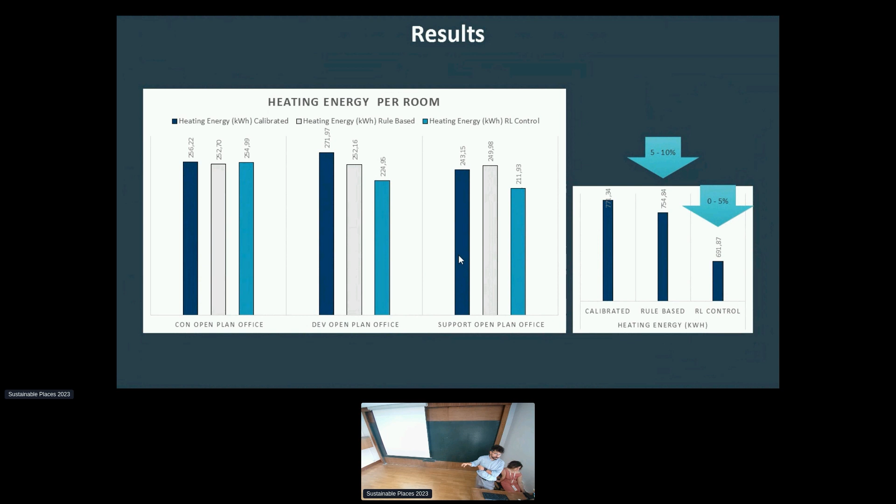And this is with no significant investment. With the equipment we have and some small devices we installed. For example, the TRV for the radiators is like 90 euros. So it's a very small investment.

And also we've made a quick payback time calculation and divided into percentage of uncertainty, because there is a lot of uncertainty in this study. And as you see, as we increase the uncertainty, the payback time is balanced between the rule-based and the AI-based control.

And in an average, like 10% of uncertainty, you can see that in 4 years we can pay back the investment we've made if we deploy the rule-based control algorithm, and in 2 years if we deploy into the building the more advanced control algorithm.

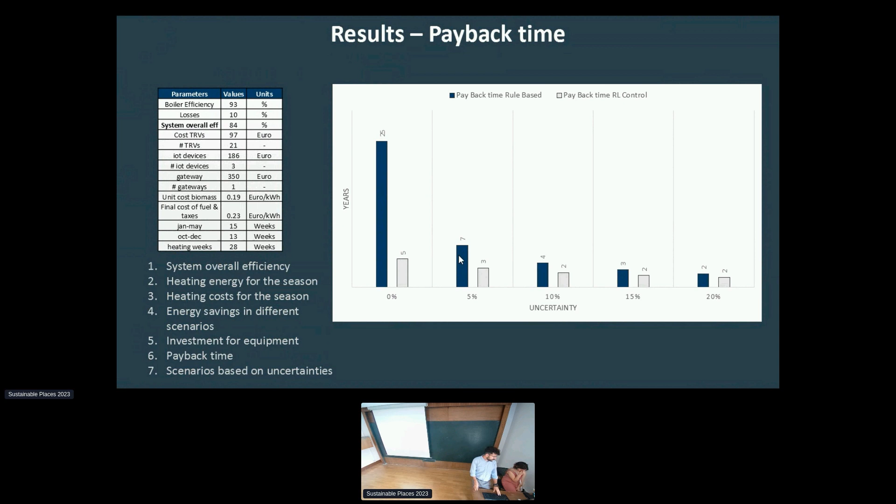So because we've done partial demonstration of this algorithm in the building, I see in the first results we have that there is more comfort improvement rather than energy at the moment in the real-life demonstration.

As you saw, the more advanced reinforcement learning outperforms the rule-based, and the estimated payback time depends on the energy uncertainties, because there is occupancy uncertainty, weather uncertainty, so it's not easy to estimate the energy savings.

The issues now are that the advanced algorithm requires expert knowledge and a lot of time to fine-tune and set up to work in the building. At the moment, it's something we need to optimize. And it's way more complex than the simple rule-based.